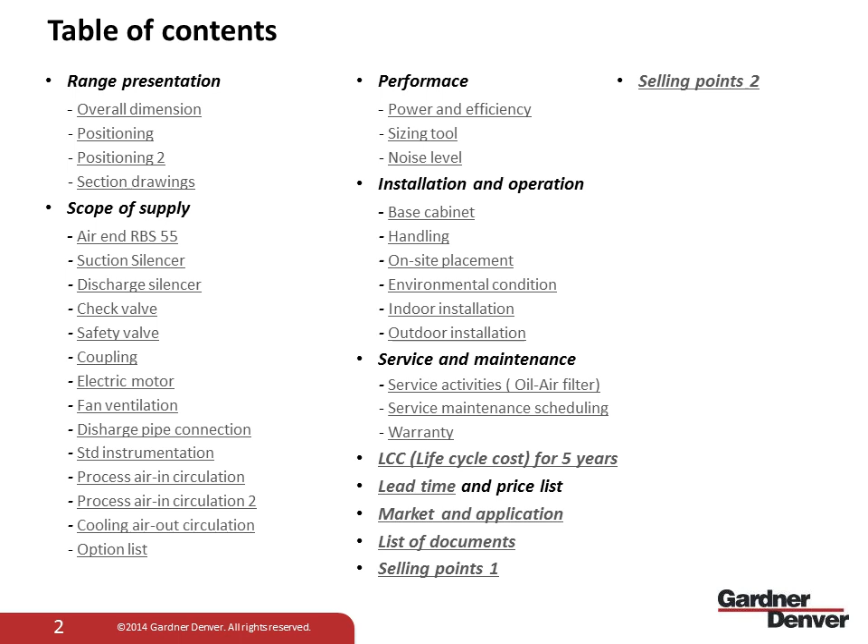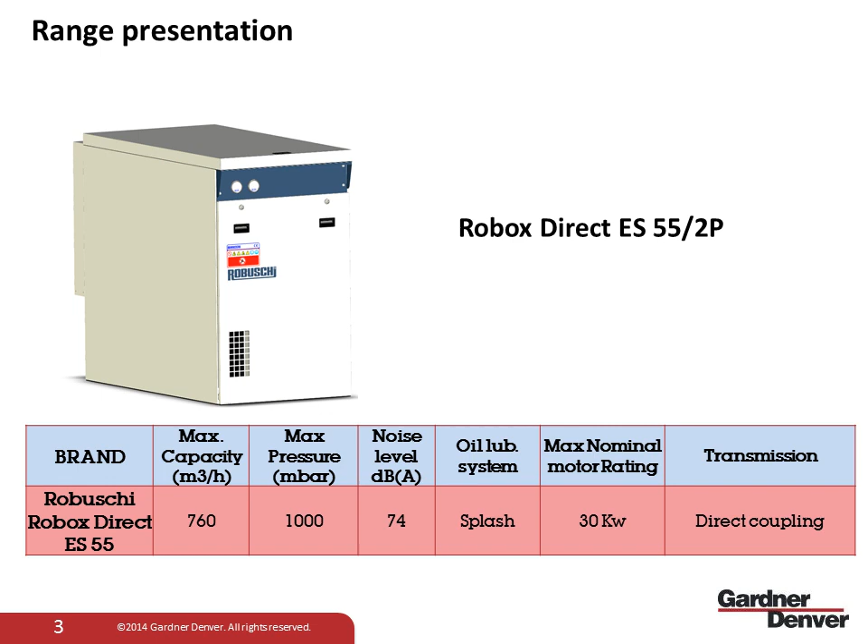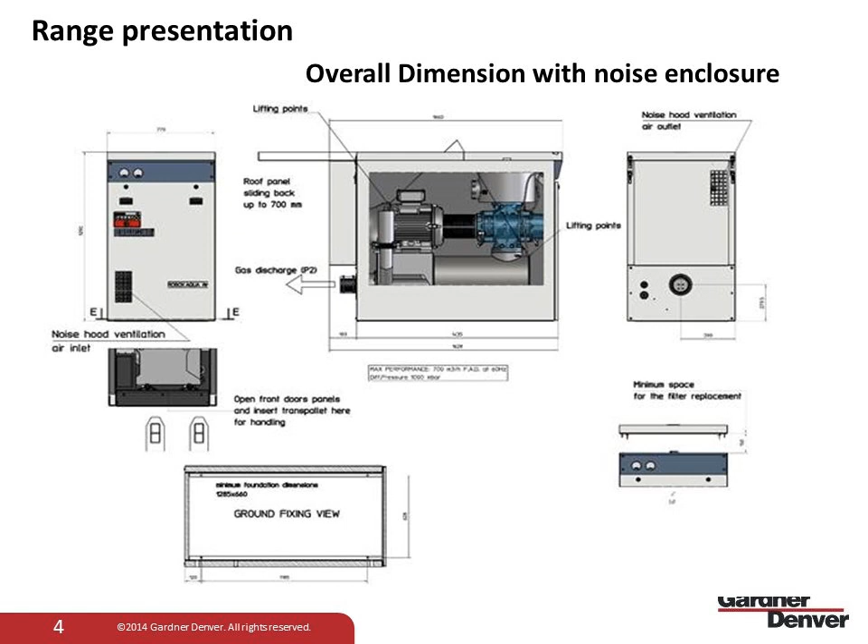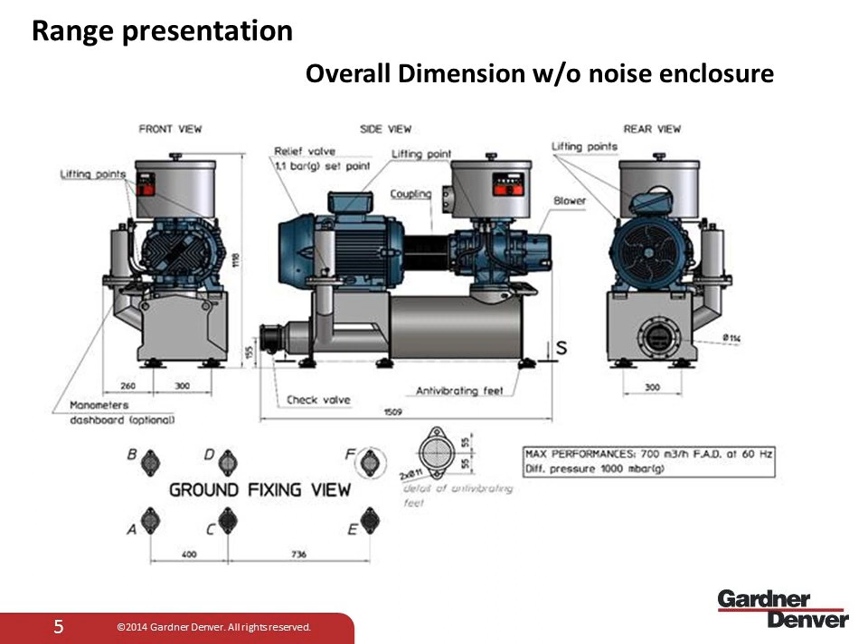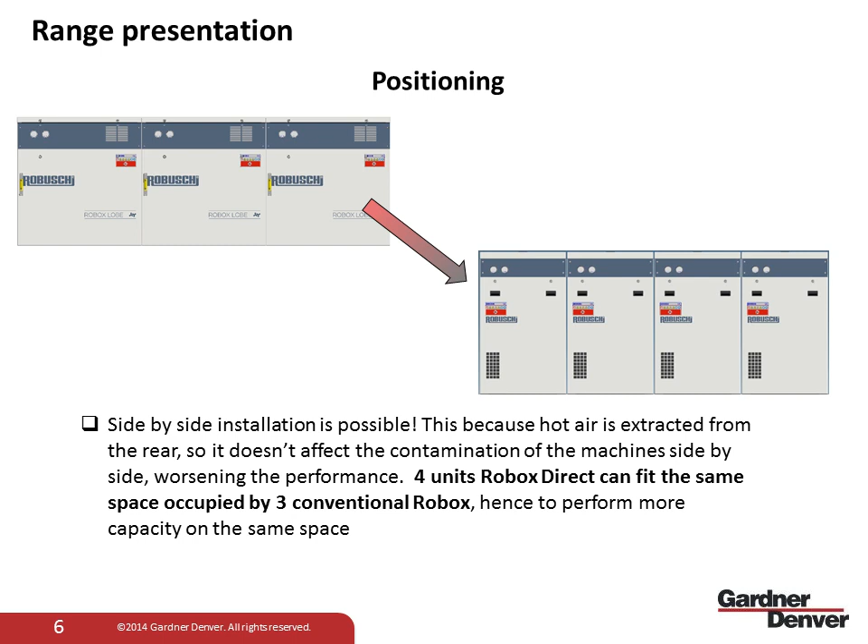Positioning is one of the main aspects we have focused and concentrated on. The footprint reduction gives the customer more flexibility during installation, without removing the positive aspects we have on the standard lobe package. For example, side-by-side installation is still one of the important features of this product. You can also see in the picture that with 4 units of Robox Direct, we can fit in the same space occupied by 3 conventional Robox units, giving more capacity in the same space. This is an important characteristic we have added to this product.

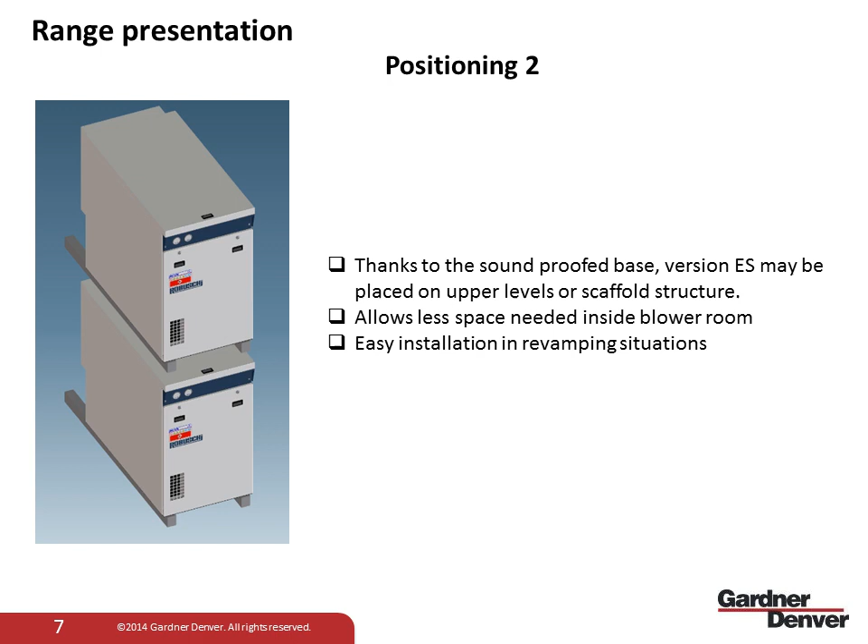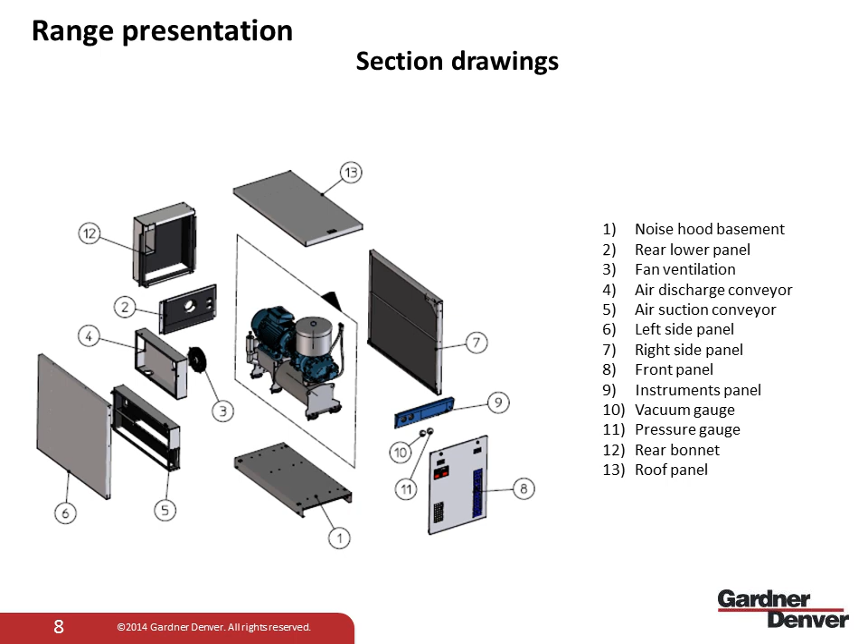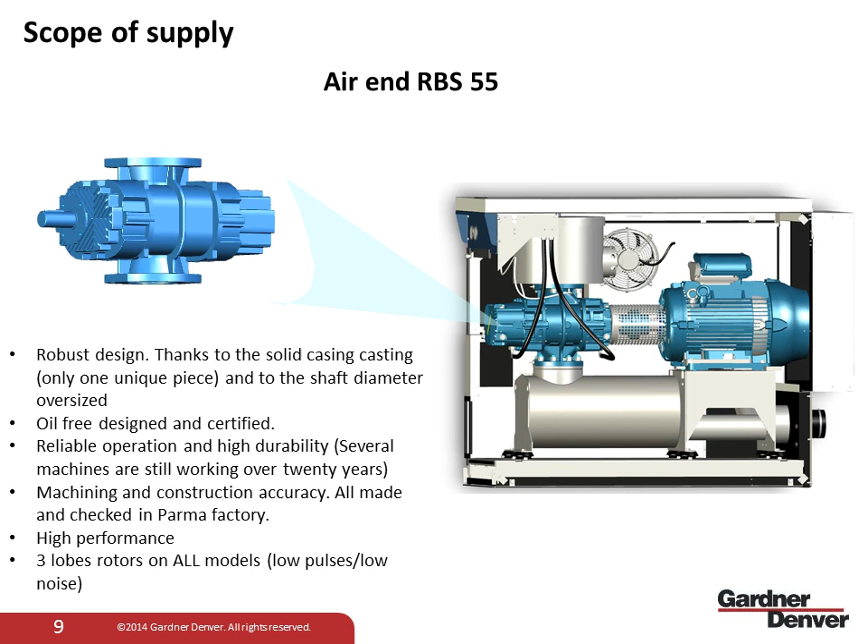We have already obtained this through TÜV certification, so this is important news for our product. The other characteristics are very well known, I think, for all of you.

In terms of suction silencer, we decided to use the same one as the standard package, the SPF, due to the double function this silencer has: absorptive and reactive. The reactive part is also patented, ensuring good noise reduction and filtration to avoid pollution of the blower.

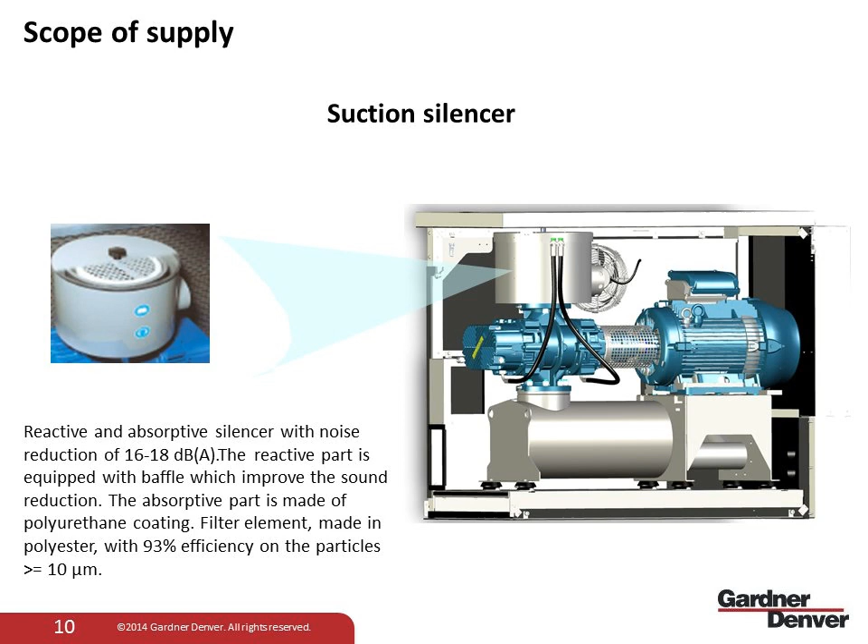Same for the discharge silencer. This silencer is only reactive, thanks to the 3 resonance chambers designed with different volumes, shown in the picture, ensuring good attenuation of noise. This is very important because this discharge silencer doesn't have any absorbent material, avoiding the possibility of pollution downstream for the process customer.

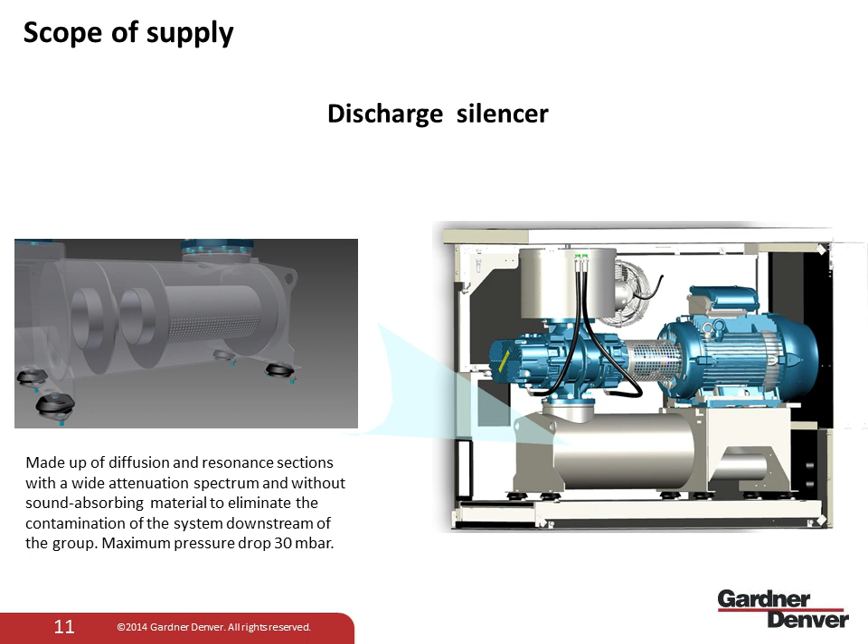Another important thing for the discharge silencer is that it's anti-spark, certified by TÜV, as shown in the slide with the TÜV certification, thanks to the internal drilled pipe that acts as a flame arrestor. This is an important benefit for the customer, preventing any kind of contamination of combustible gas with possible sparks generated by the blower. It's also important because it saves the customer additional costs for spark traps or other similar devices.

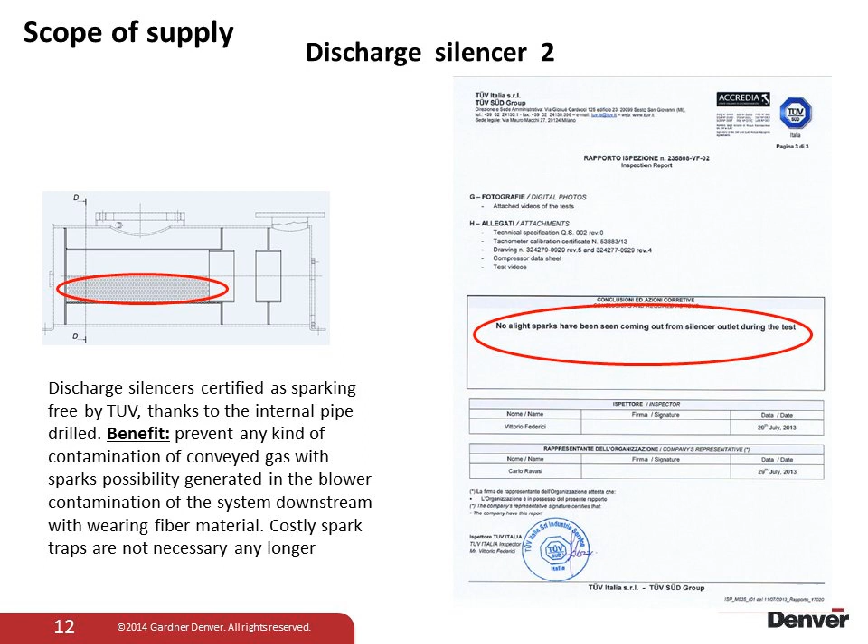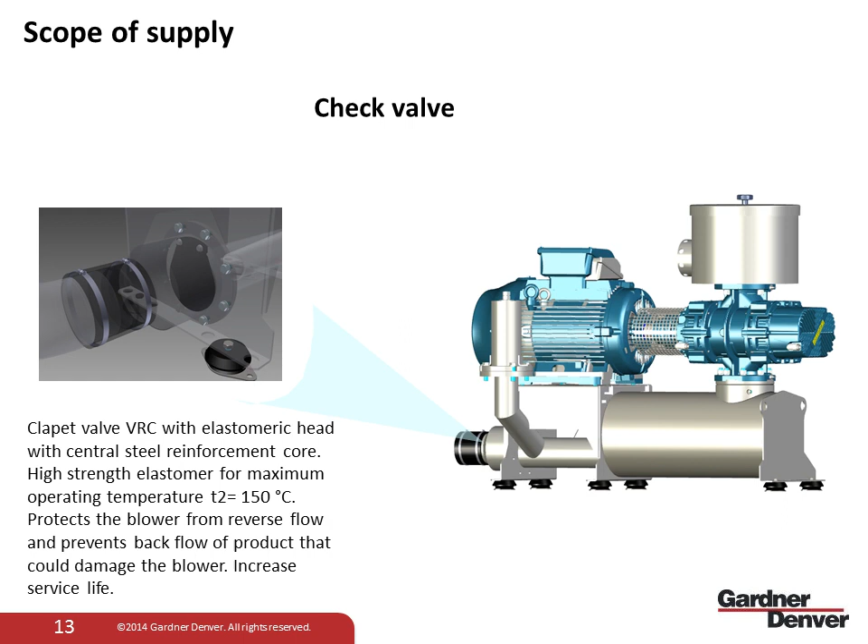In terms of protection, starting from the check valve, we use the same components as the standard package. This is a simple check valve used to protect the blower against reverse flow, exactly the same components as the standard package, so in this case we haven't added anything.

In terms of safety valve, we also use the RVP safety valve, which is used only to protect the blower and not the customer system. This is very important to know. The valve is completely settable by Robuschi or by the customer itself in a very simple way, and in the next slide we will see how we can do this.

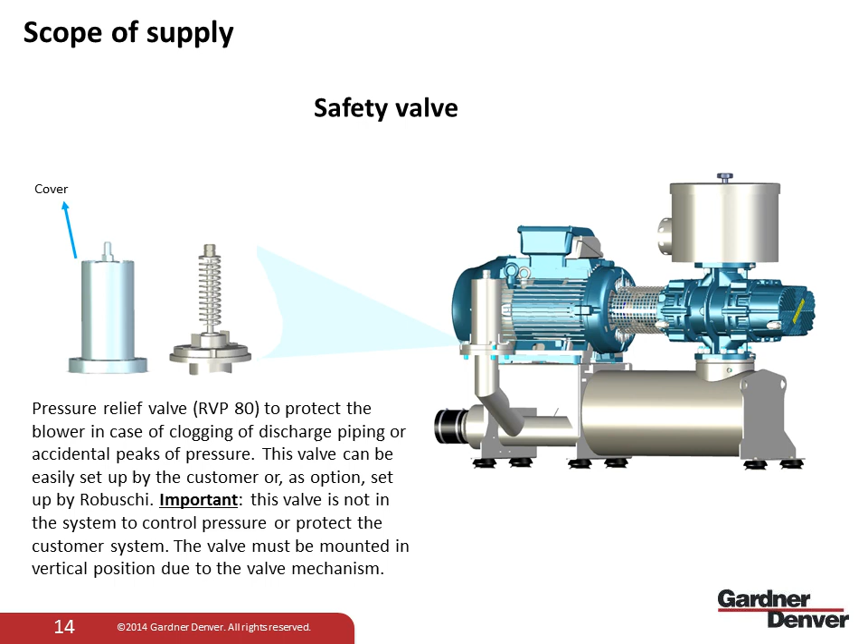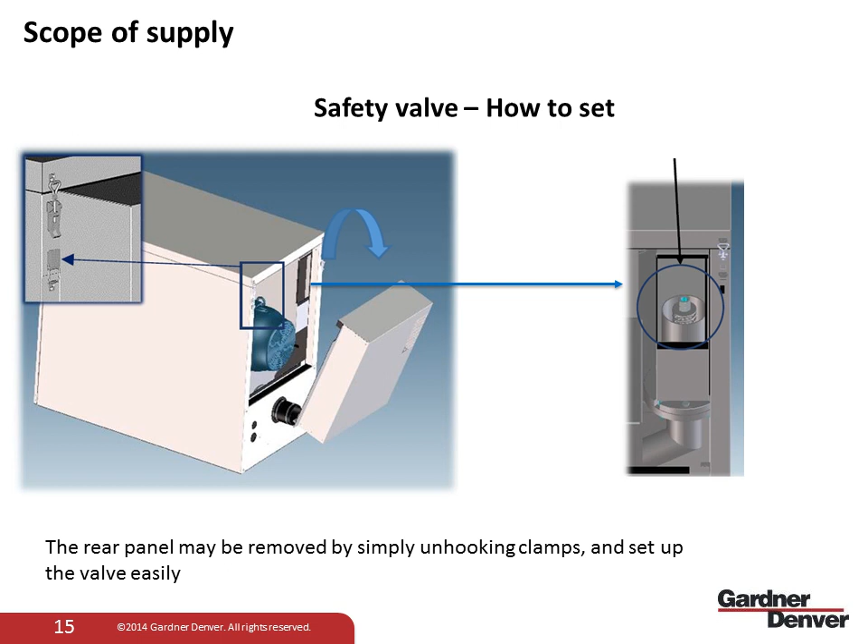So practically, the slide shows how it's possible to set the valve. As you can see, we have studied a very good solution to make this operation easy and more comfortable for the customer, to save money and time for the customer.

The coupling is one of the main differentiations compared to the standard package. We have studied a dedicated plate for the motor, designed to fit 2 different sizes, 30 kilowatts and 22 kilowatts, and also a direct coupling that ensures better efficiency and less maintenance compared to the traditional system with transmission belts, guaranteeing 100% efficiency.

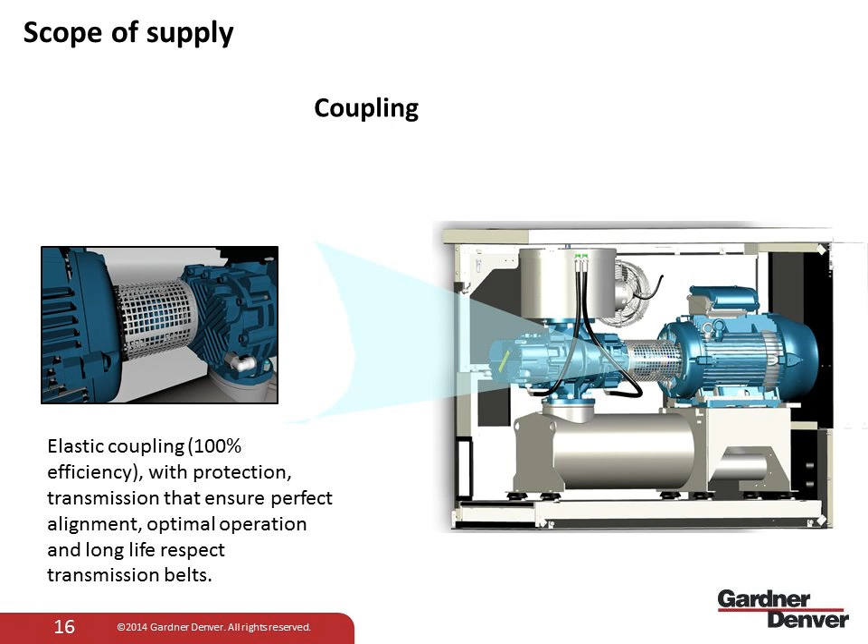About the electric motor, as I said before, we consider only 2 power ratings, 30 kilowatts and 22 kilowatts, that match exactly the key performance values shown at the beginning of the presentation. Motors are absolutely standard following the IEC normative, with 2 sizes, 180 and 200, and can be installed inside the package. The brands we already have for this standard package are VEM and ABB.

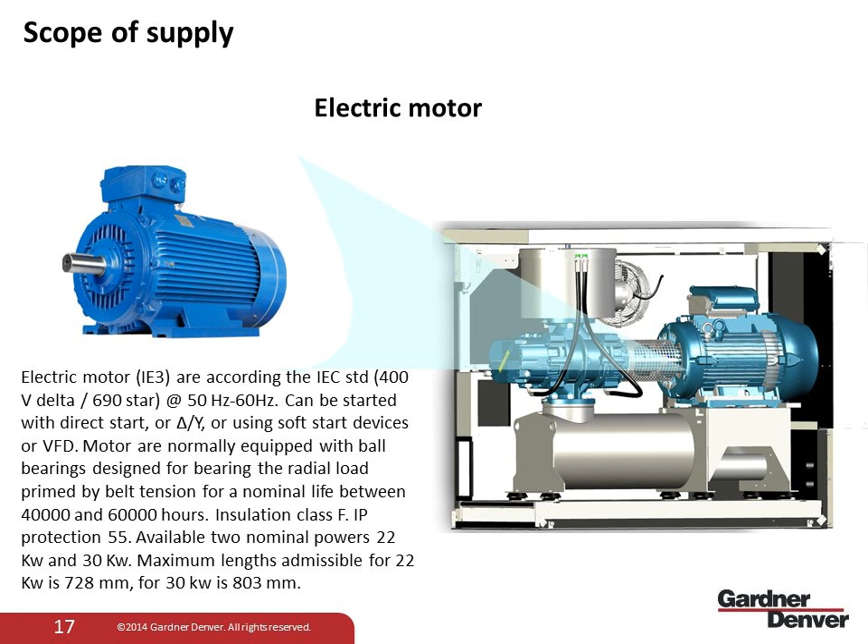Another important thing I want to show in this slide is the maximum length admissible for the 2 powers mentioned, 22 and 30 kilowatt. This is just to give you the possibility to know the space inside in case the customer wants to install his own motor. But we prefer obviously to sell our own brands that I mentioned before. In case the customer wants to install his own motor, these maximum lengths can help you.

About the fan ventilation, also in this case we used a similar fan to the one in the standard package. It's an extraction fan that ensures the evacuation of the hot air inside the noise enclosure, and it's completed with a terminal box for a good and easy connection by the customer.

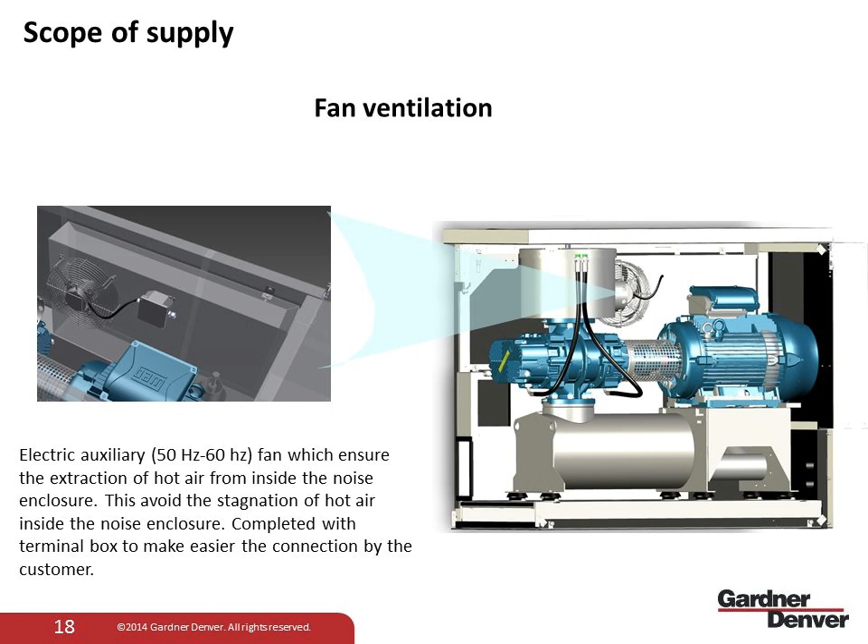About the discharge connection with the customer's process, we use the same type in this case as well. So we don't introduce any different system, to have a quick and easy installation in case of a revamping solution, for example when you have to replace an old blower. In this case, installation is very easy because the flange connection is practically the same.

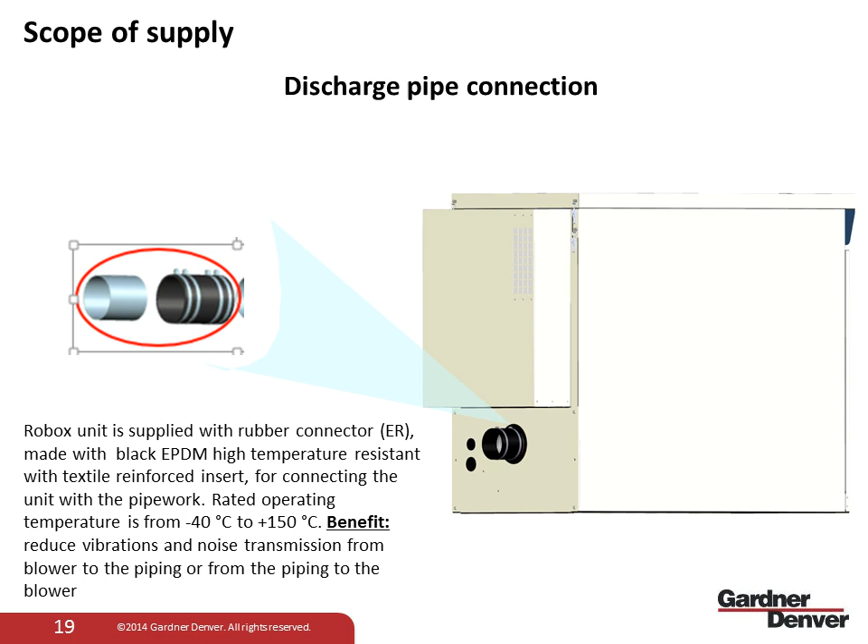Standard instrumentation: we obviously use the same gauge type as the standard package, to ensure correct measurement of filter clogging and discharge pressure. Nothing to add about this.

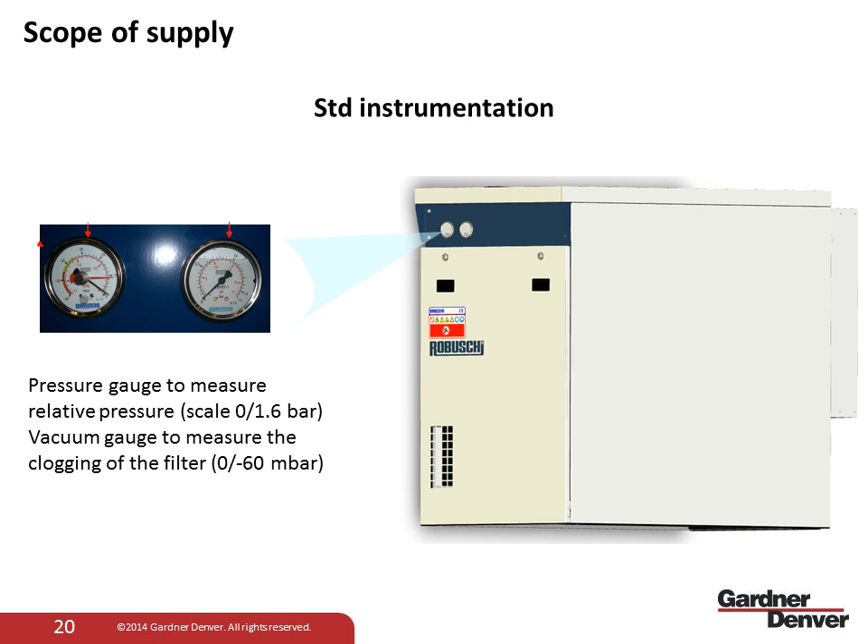Process air circulation: in this case, we have completely reviewed and restudied the process air circulation inside the package. Compared to the traditional package, the fresh air inlet is on the front, and you can see the grid in the front panel. Then, going through a specific conveyor that we'll see better in the next slide, it goes first to the blower, ensuring better cooling, and then is sucked through by the silencer.

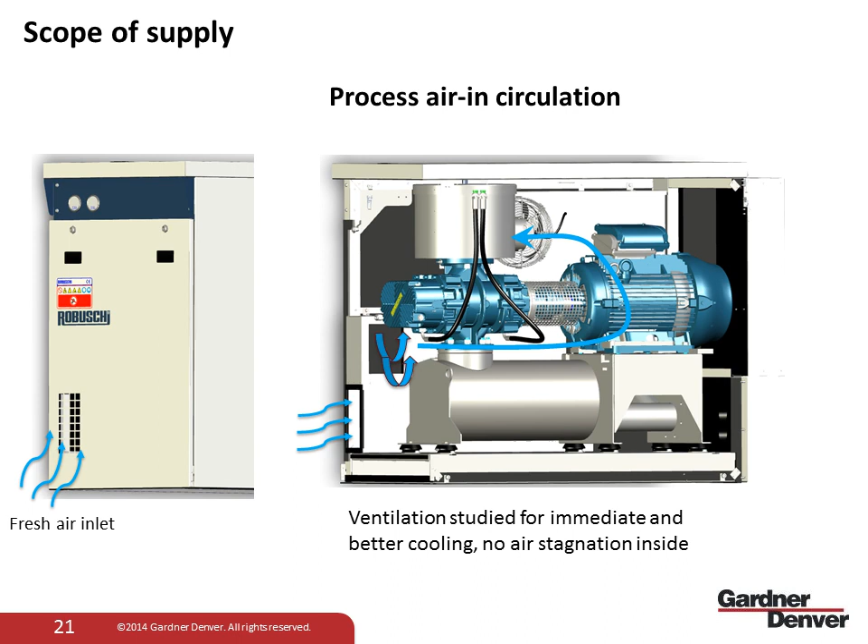In this slide, we'll see better the inside suction conveyor with the flow path, and there is also a secondary window used for cooling the electric motor. With this new process air circulation, we guarantee good cooling of the two main components, the motor and the blower. This has been completely studied and reinvented, as I said before.

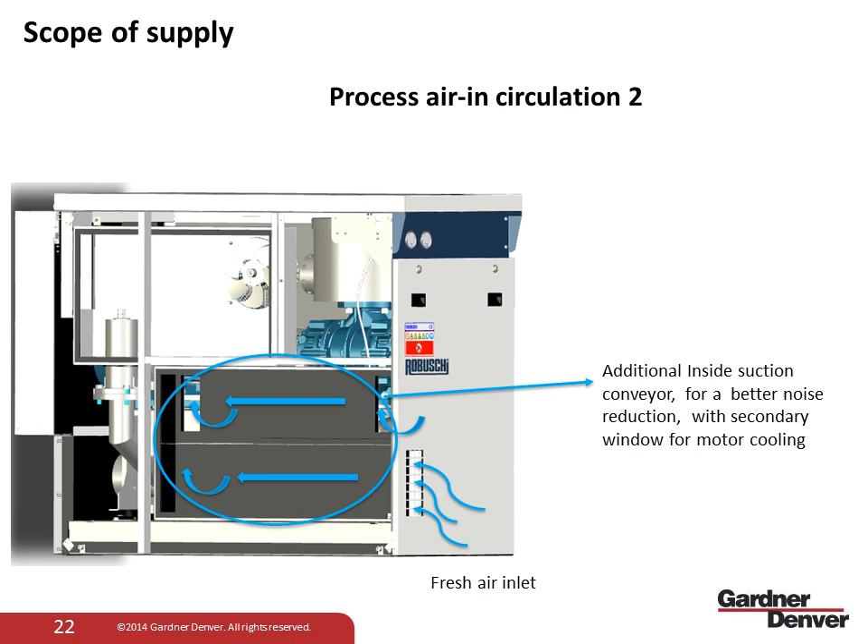About the cooling air out circulation, we have also reviewed this part, designing a specific exhaust conveyor that ensures extraction of the hot air coming from the noise enclosure, and also the hot air coming from the safety valve if it's open. Despite a very compact design, we avoid any stagnation of hot air inside the noise enclosure. This is an important feature we've added for this product, and you can see the hot air is completely exhausted on the rear part, which also avoids possible problems if blowers are installed side by side.

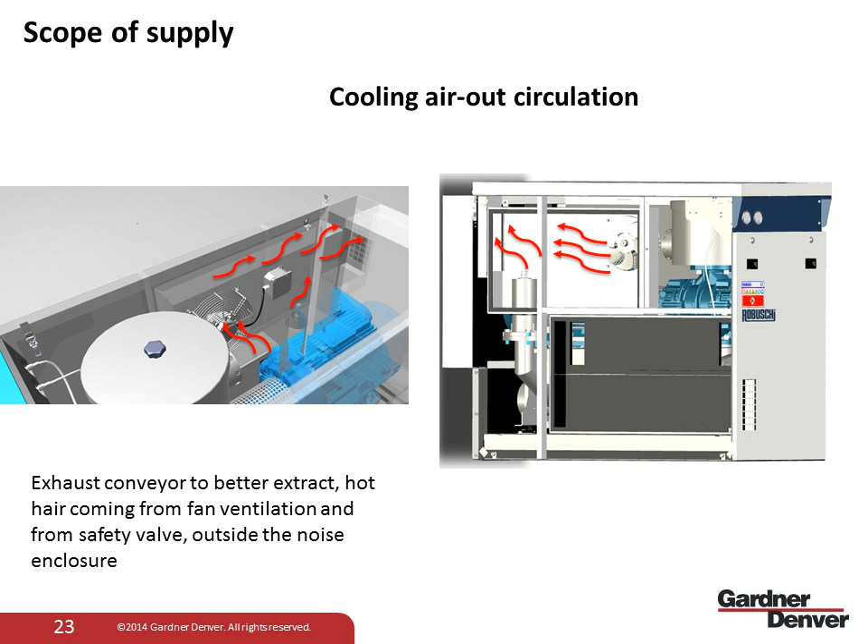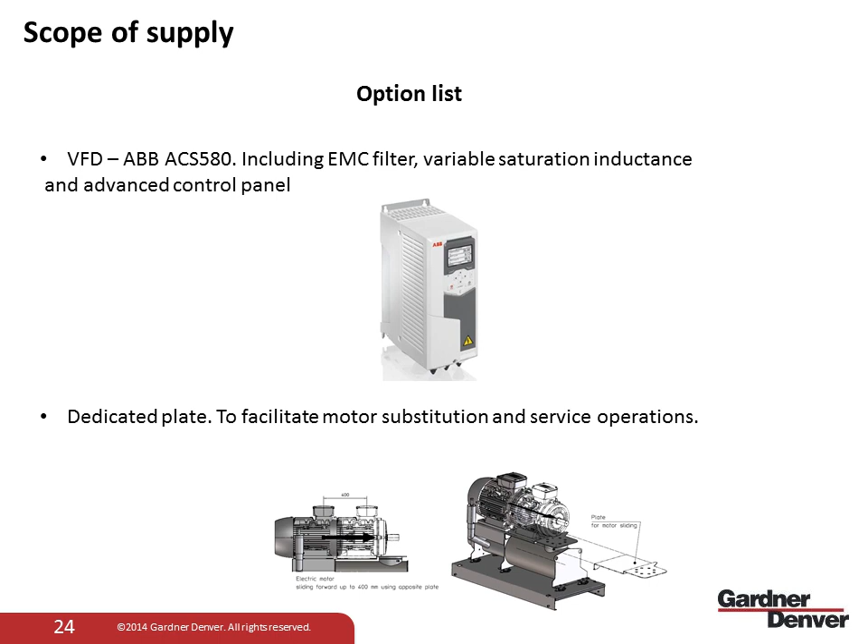Going to the option list, for this product we currently have only two very simple options. One is the inverter, which is just a common inverter that the customer can buy, and it's then the customer's responsibility to install it in a proper electric cabinet. The other is a dedicated plate used to facilitate motor substitution and service operations when necessary. These are the only two options for this product.

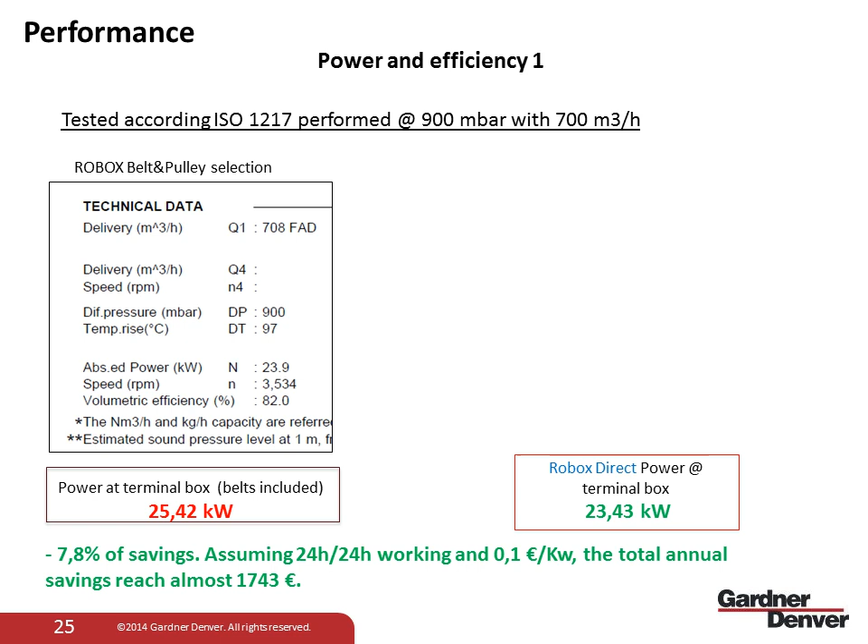About the sizing tool, we use the same sizing tool that we use for standard product, with the only difference that, to use it in the correct way, it's necessary to use as model the CRBS. That means obviously blower direct coupling. But for the rest, the sizing tool is completely the same.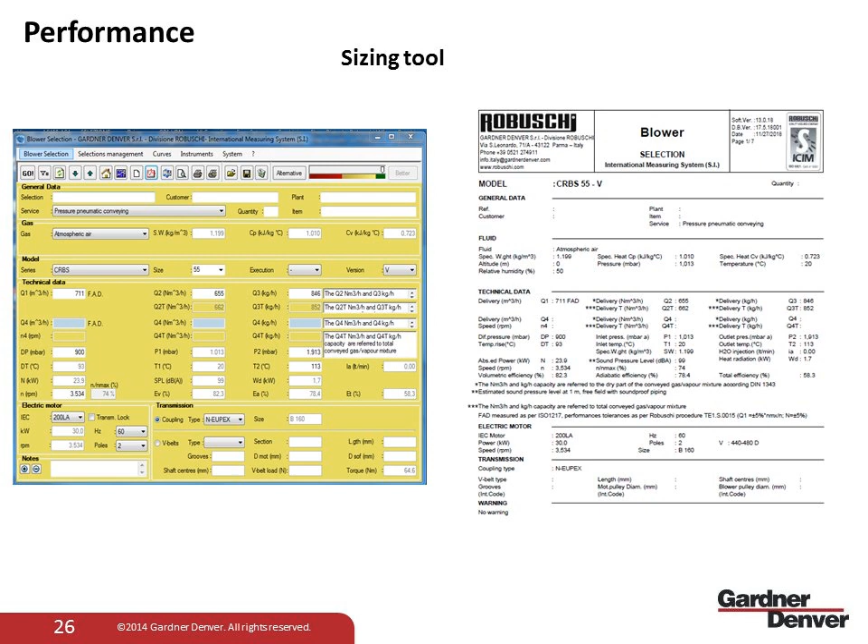Noise level, also in this case, is an important feature to show, because we performed this test in our lab according to the ISO 3746, and we got a very good result. The test was performed at 900 millibar and 700 cubic meters per hour, and the final result was 74 dBA, which, despite this very compact design, is a very good result.

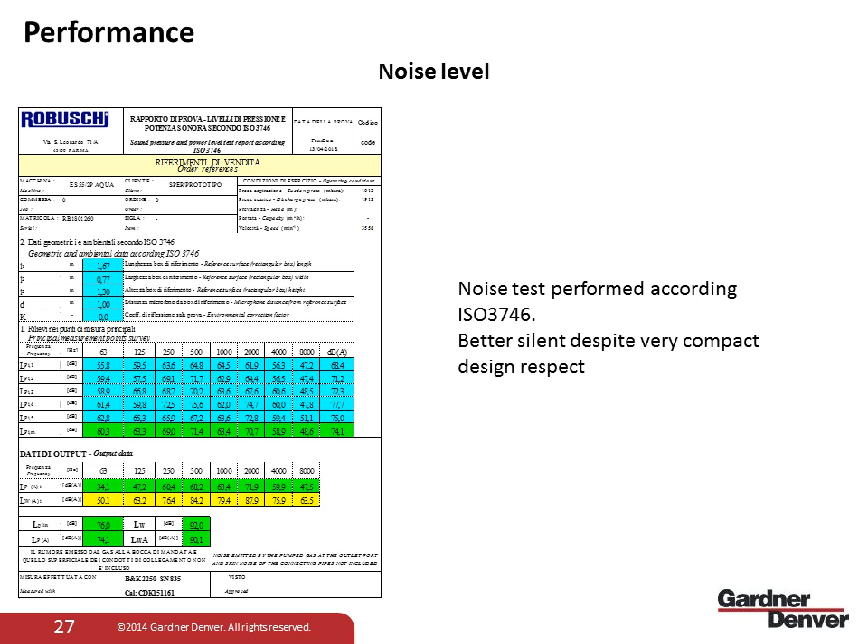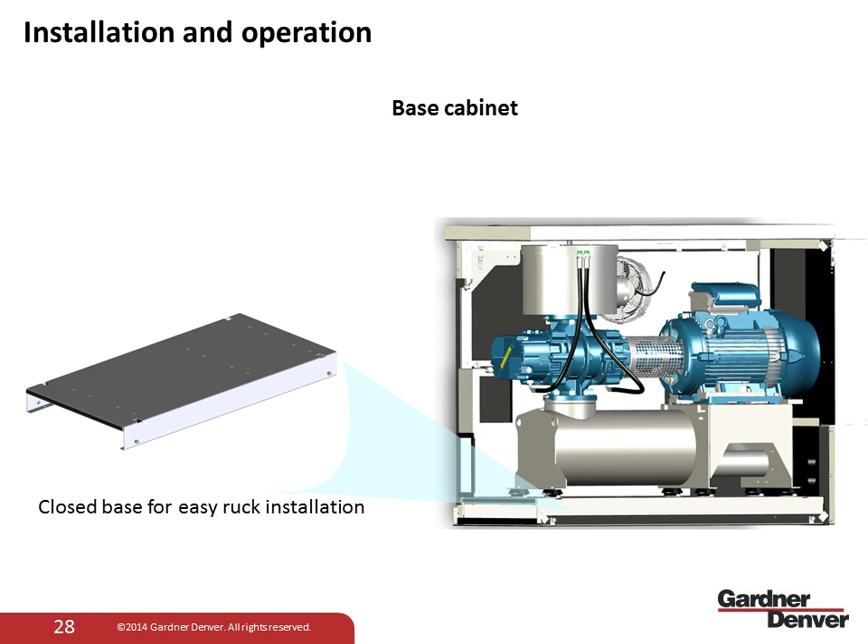In terms of installation and operation, I mentioned at the beginning that this product has standard features as a closed base for rack installation or scaffold installation. This slide shows only in which way this part is made, which is a very new introduction for our product.

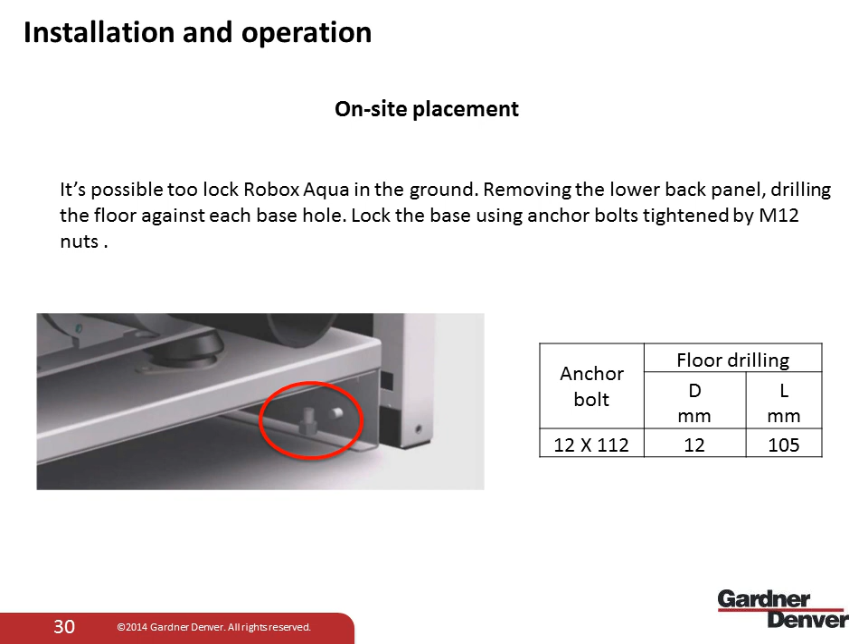We recommend for the on-site placement to anchor the Robox Aqua to the ground. It's just a suggestion, but it's not necessary if the customer doesn't want it. This slide shows how to do this and which kind of anchor bolt to use. Just information for the installation operation.

In terms of environmental conditions, this machine is suitable for standard operation environmental conditions, so between minus 20 degrees and 40 degrees, and these conditions are in accordance also with the electric motor conditions. So we have combined these two features, the blower and the motor.

Okay, we have a question from Cristina Cavazzini: is it possible to lift with a crane? Yes, it's possible, and we can go back to the slide that shows this, because we have anchor points. We have specific parts on the package that allow this. So the answer is yes, absolutely yes.

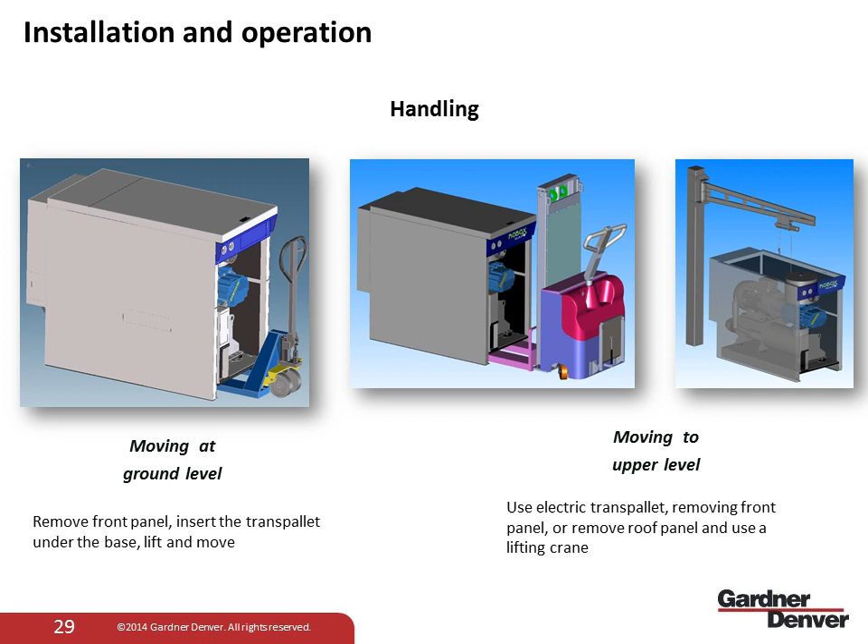Okay, going ahead. And another question by Antonio Stefanile: is it possible to install the blower above 1,000 meters of altitude? It's possible, but we have to pay attention to the electric motor, because if the altitude and the suction temperature have a combination that is critical for the motor, because of the rating thermal possibility, for sure we can install in this condition, but we have to pay attention to the motor.

So the motor will obviously be non-standard, and it's important to pay attention, because being the motor non-standard, we have to check if fitting the bigger size is possible or not. And this is the answer.

Another question by Claudio: why below 1,000 meters? Okay, it's the same as Antonio asked before. So the answer is that for the blower it's no problem. The problem is for the motor, and due to the fact that the blower is a very compact package, it's better to pay attention and see if it's possible to install a bigger motor or a motor with some characteristic that avoids the possible problem that the environmental condition can bring to the motor. So the answer is yes, but it's better to come back to us to see if it's possible or not.

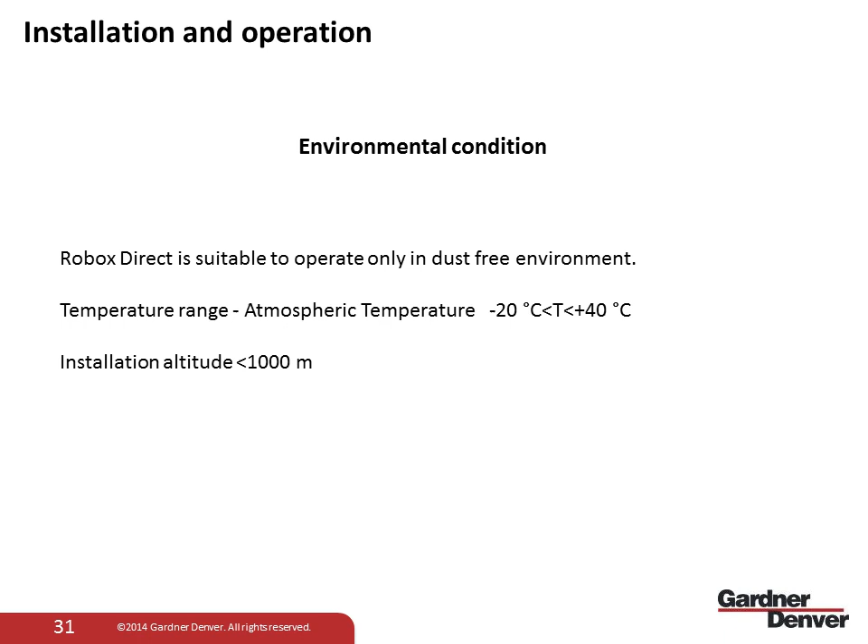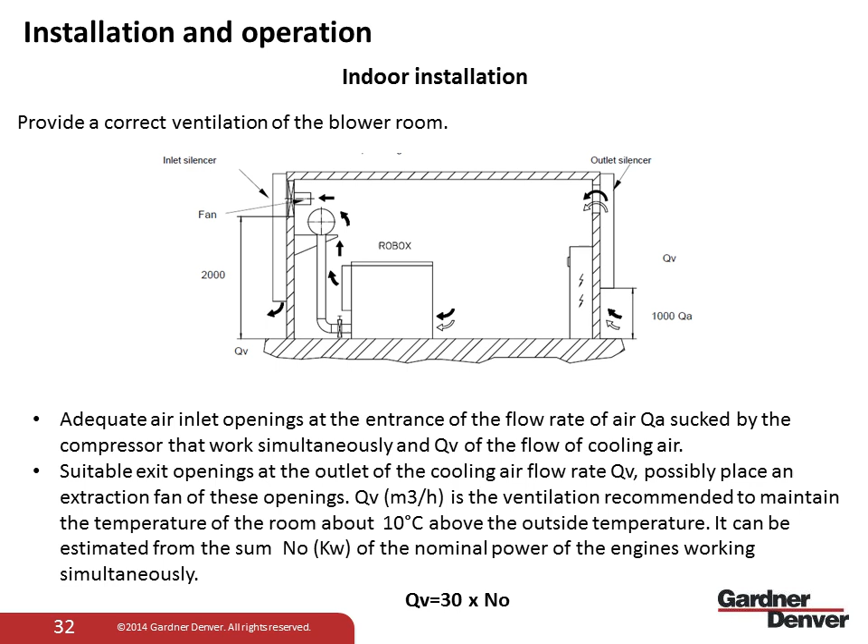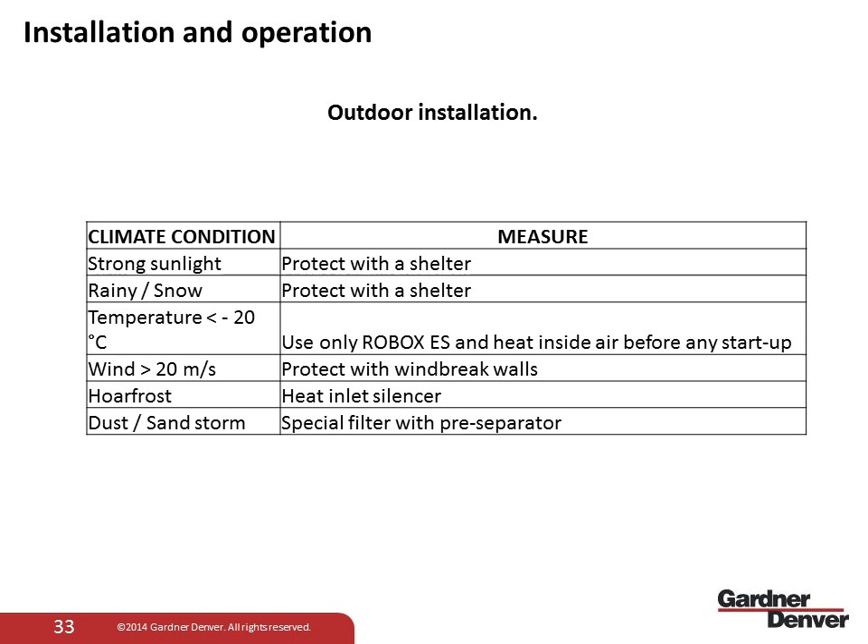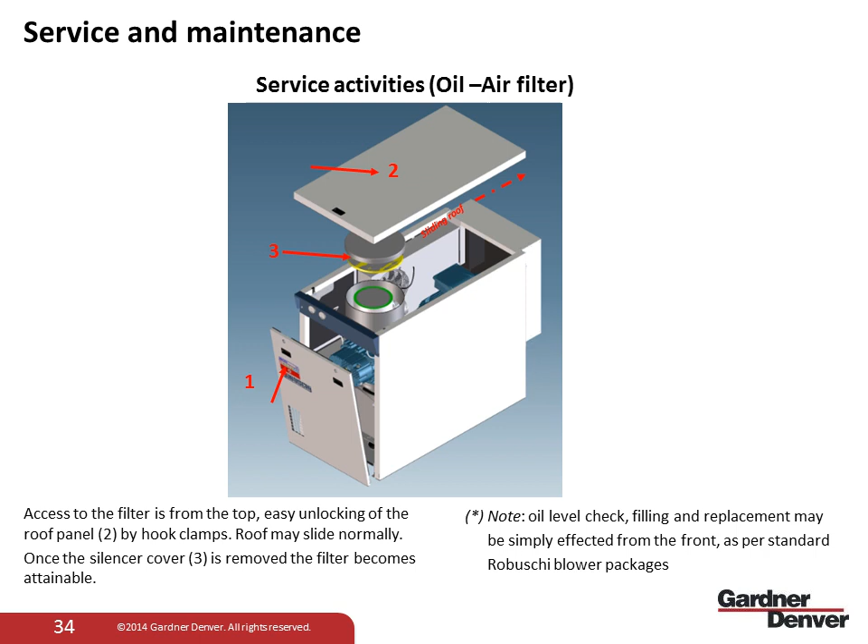Okay, just to give a service maintenance scheduling: the change of the oil, the replacement of the air filter, and the general inspection, which are practically the same as the standard blower and standard package.

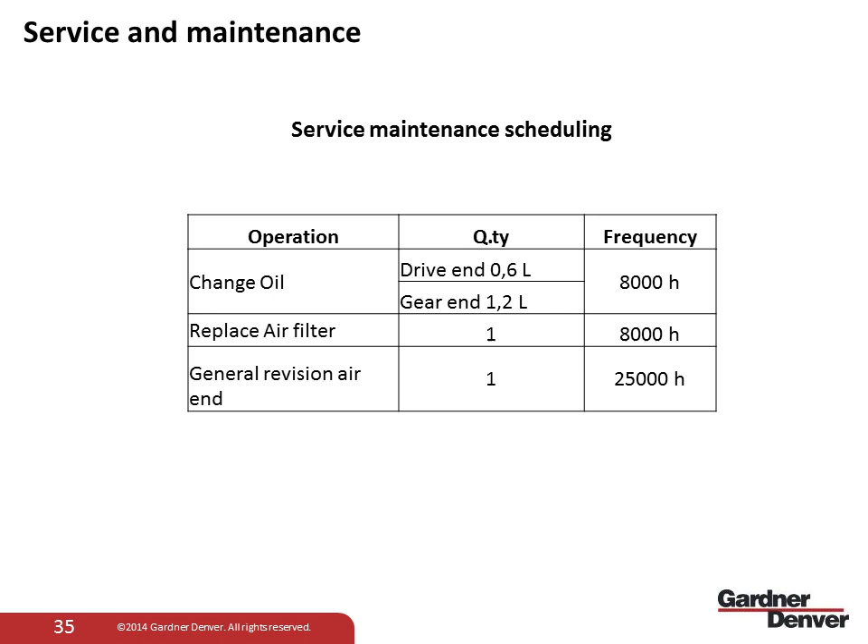We have another question by Claudio. Nine weeks lead time is a lot. Yes, correct, it's a lot, but because this is a new product with new components. For example, the base frame, the base cabinet, and also the noise enclosure are designed in different ways. So at the beginning, for sure we will have some issues in terms of supply chain. During the launch and during the year, for sure this value will decrease, but at the moment, also according to the supply chain, this is unfortunately the lead time at the moment.

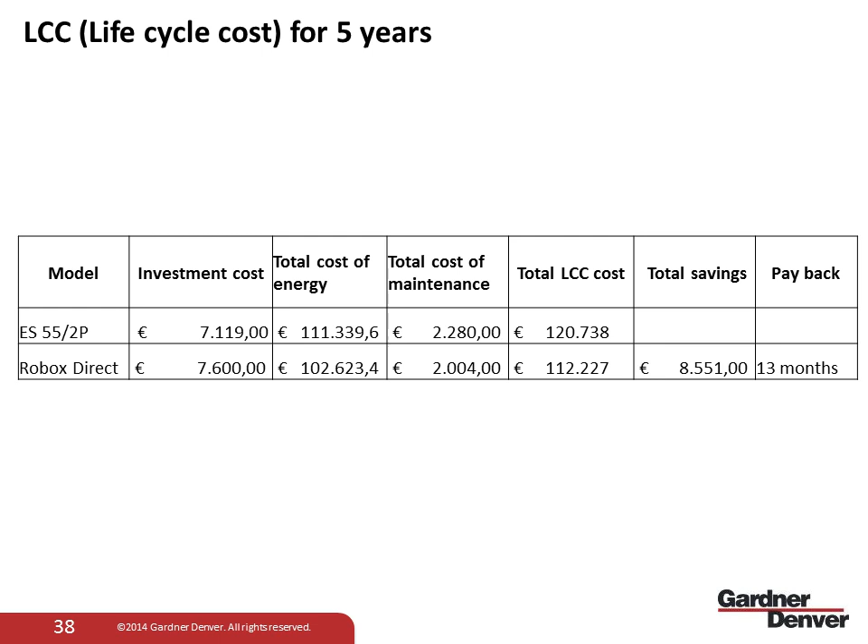Market application, just to give a very rough idea, for example in wastewater treatment, in which sector we can use this machine. We can see in this slide a scheme of a traditional wastewater treatment plant. The Robox Direct can be used for air bubble, sand, and oil separation system. In this case it's necessary only a machine that goes at fixed speed. For the bubble oxidation system, for sure in this case we need an inverter, as Claudio mentioned before, and also for the filter backwash system. In this case, this operation in the wastewater treatment is an intermittent operation, the machine has a start and stop intermittent, so mostly with fixed speed.

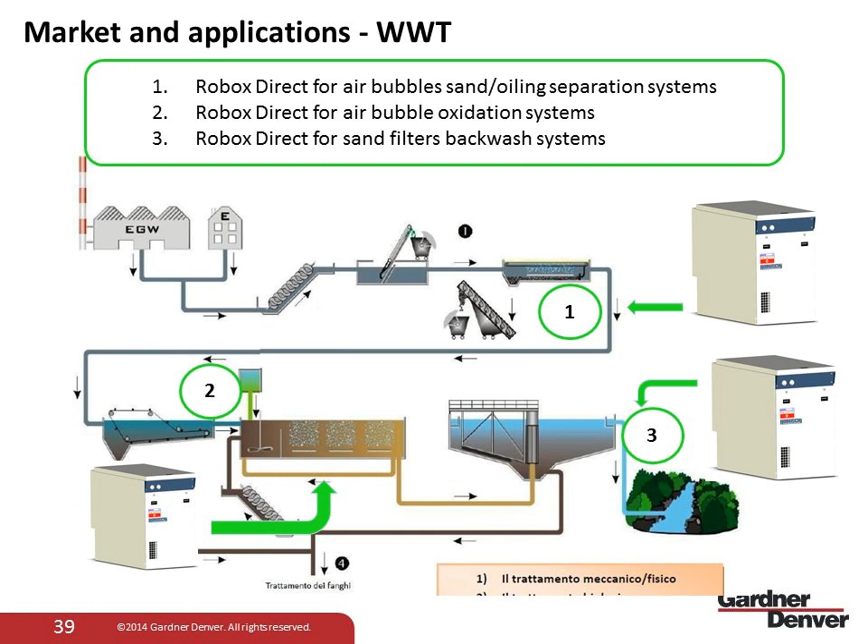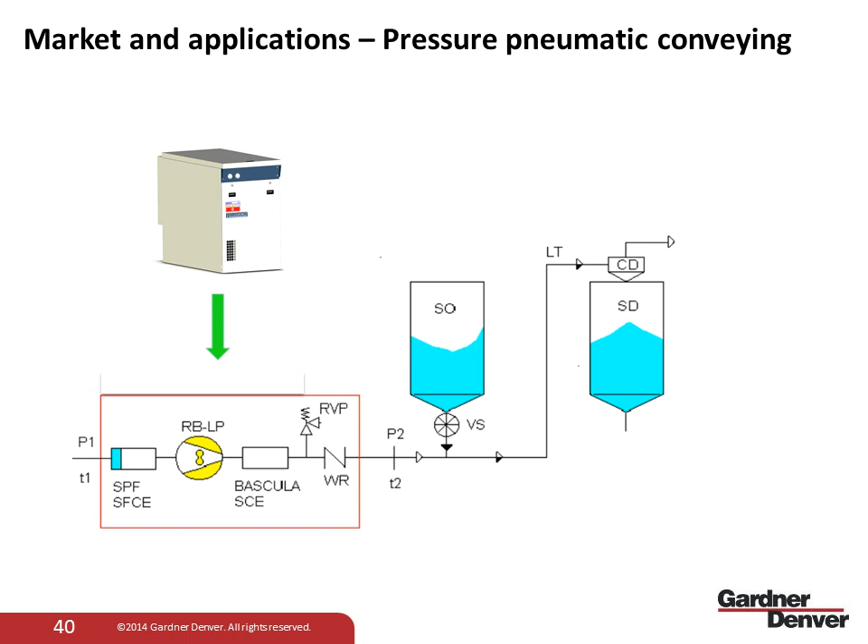Also in pressure pneumatic conveying, same thing. This is a large pressure pneumatic conveying plant scheme, just to show where Robox Direct can be used for conveying, for example flour or sugar or anything else for food and beverage application, or other things like cement, etc. Just to give a very quick use case for the application.

In terms of the list of documentation that will be uploaded to the website, we have technical specification, the complete technical specification of the product, operating and maintenance manual dedicated for this package, brochure that we released with Christina - thanks to Christina for this - drawings, P&ID, noise data sheet. So every piece of information about this product is available and uploaded in RepsNet, so it's possible to have everything.

Antonio told me that there is some problem on the audio. I don't know if now you can hear.

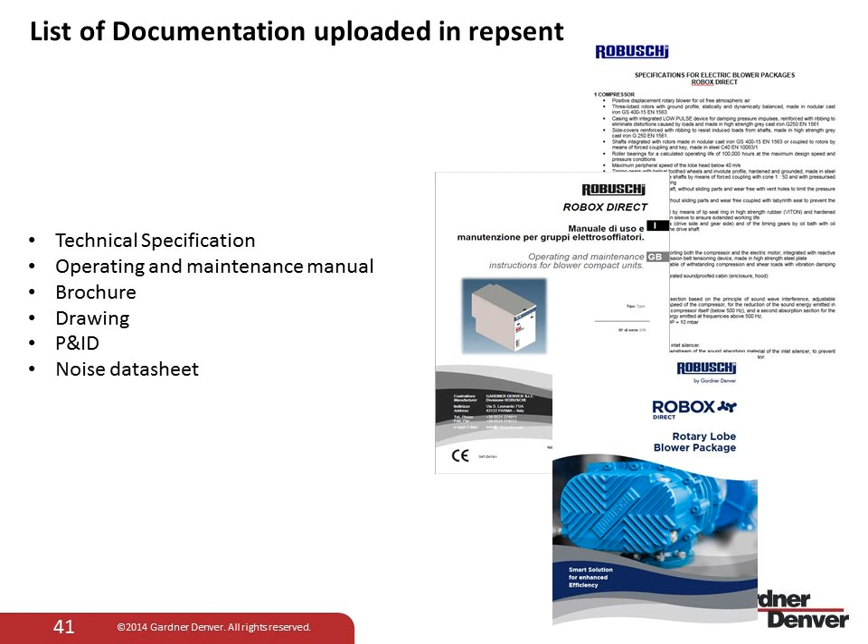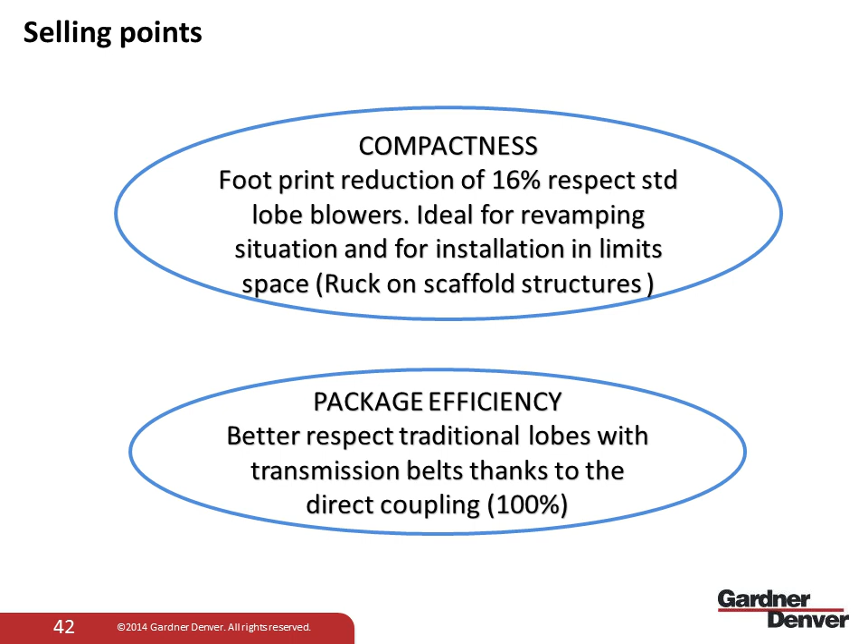Just to recap the selling points: the selling point for this product is the compactness for sure, so the footprint reduction of 16% respect to the lobe blower. The package efficiency, better than the traditional lobes with transmission belts, thanks to the direct coupling, and the fact that we have ease of use and maintenance, thanks to the absence of the transmission belts, which guarantees better maintenance operation. We are saving money and time.